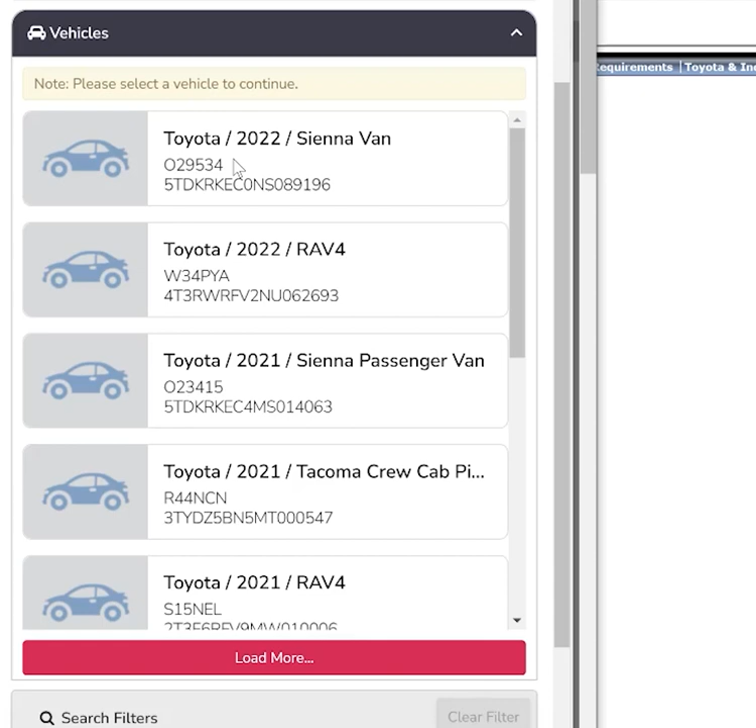So now I hit search, I allow the hamster to kind of go find the database information and then bring it back to me. Usually takes a few seconds. So now when the search is done, I'm able to see all the vehicles that met this criteria. So I can see that I have a Toyota Sienna, a RAV4, a Tacoma, and I actually have a Camry down here. I know from previous experience that this Camry does not have any calibrations done. But I do know that this Tacoma does.

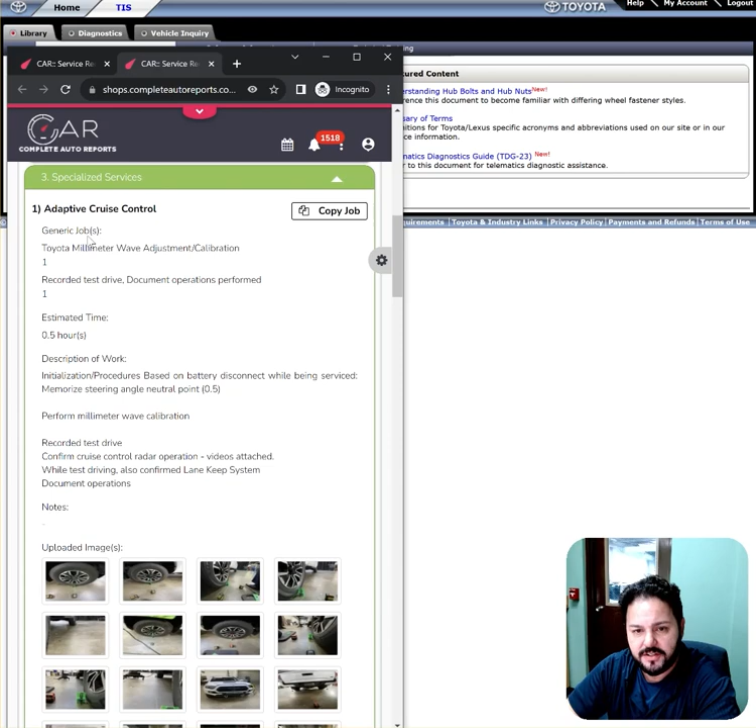So if I want to just look at what I did for this Tacoma, I can click on that link for the vehicle itself, and the system will now load only the services for that Tacoma. If I click on the car ID, it will open that service request in a new window. And here I have all the services that were performed for that Tacoma. So now I have my millimeter wave adjustment and all the notes for that Tacoma. I have the headlight adjustment, notes, photos, lane departure calibrations, and here is my pre and post scan.

So the pre and post scan, as discussed, is where we lay out all the relevant information to let the insurance company know what we're doing, why we're doing it, and how we're doing it. In the vehicle that we are working now, I did this yesterday, so I'm just showing you that I copied that job from here, and then I'm able to paste it on the fly. So in the service request, I can hit paste.

It will show me the job that I copied to the clipboard and most of the information within it. And if I press paste, it will paste that in. If I do it now, it's just going to double it up. So I'm going to show you that everything is already here. And I've gone through some of this.

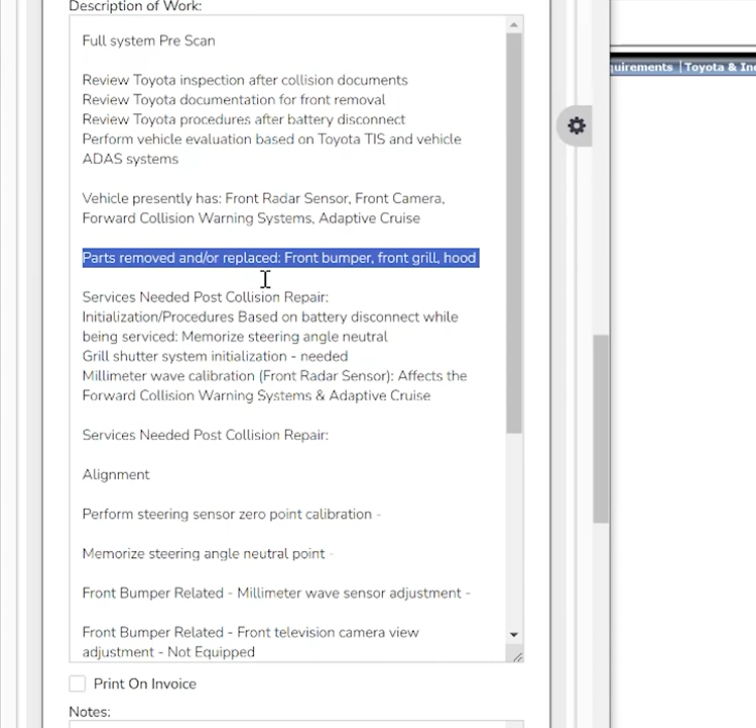So now, in order to start finding relevant information with regards to the collision or the services you're performing, you typically need a list of parts that were removed or replaced. So in this case, the body shop has informed me that they've removed and or replaced the front bumper, the front grille, and the hood. So we know that all of the damages incurred all come from the front end of the vehicle.

Going into Toyota's TIS platform, once you're logged in, you choose the type of vehicle, model, and year that you're working on. So Toyota's pretty simple. I wish they would allow for VIN numbers sometimes, but I've grown accustomed to how they do things here. So now I'm going into Camry. This is not an HV Camry. And confirming we are working on a 2018 Camry. And now I hit search.

And once I do that, typically you'd be on the summary page. The summary page will load all of the relevant information, which is overwhelming, but it does it by sections. So here you have tech tips, service bulletins, Canadian and Mexican bulletins, some quick training guides, repair manuals, electronic wiring diagrams, explanations on new car features, campaign publications, and collision repair. So in order to start your journey with searching on OE info, I suggest searching for the simplest thing first.

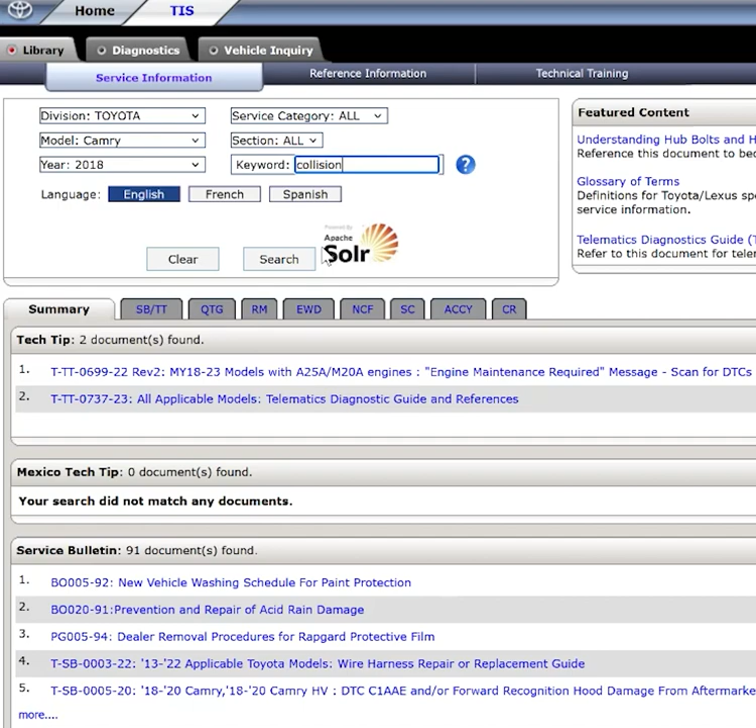But typically, the best way to start with any OE information and searching is just search for the simplest words first. So I would recommend you search for a word like collision or accident. In this case, we're going to search for the word collision, press search, and see what results we have displayed.

So in the service bulletins, you're going to see any items regarding collisions. In this case, there's some bulletins about the radar and the forward recognition camera system. Going into repair manuals, now you have more information on pre-collision systems, and if you were to click the more link here, it would bring you to a ton more information that meets the search word collision.

So going down into the most important part, in my opinion, to get started, is the collision repair section within Toyota. So if you go to this section, you are going to find a ton of information. So we're going to press more, and now you will see that a ton of info is loading here. In the beginning, I honestly recommend you spend a little bit of time and read some of these, because it'll only help you find things faster as you keep doing this.

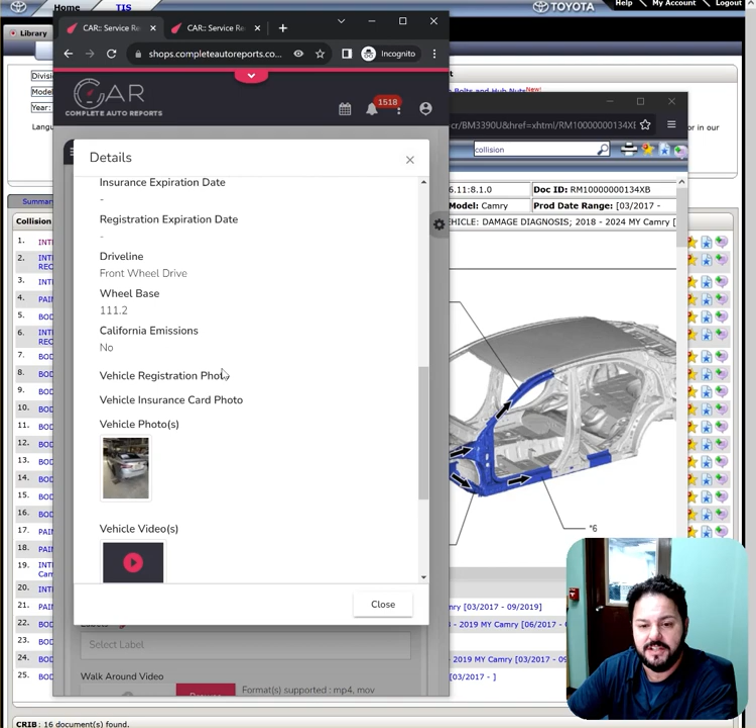But we're going to start with the very, very basic one, which is introduction about this vehicle, damage diagnosis. So clicking on this brings up a pop-up, and the first thing they want you to do is let them know what the manufacturing date is. So we are going to not leave our desk, because this is exactly the reason why we started CAR. And we're going to look at our VIN label and find out that the manufacturing label states this vehicle is manufactured in August of 2018.

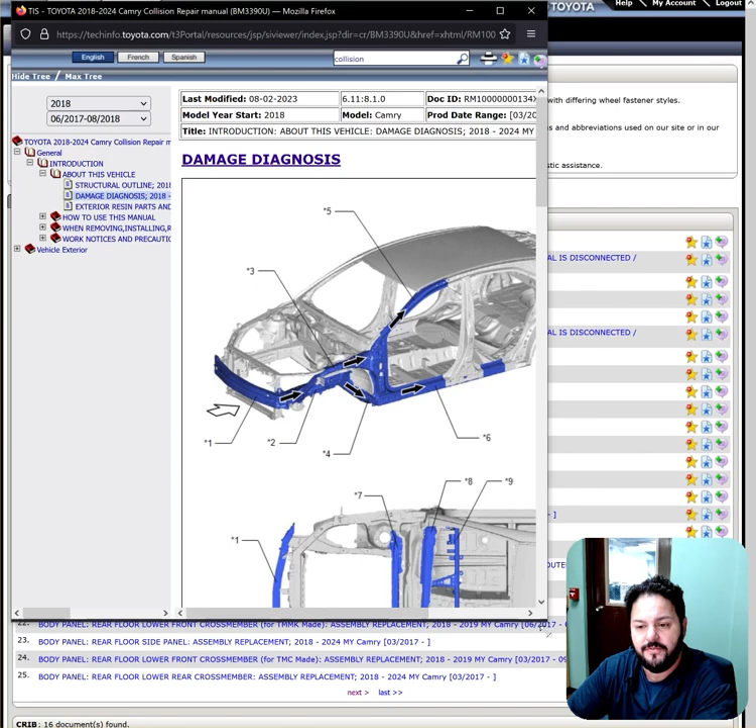So that is the date range, and now we have the most relevant document available in damage diagnosis for this vehicle. So Toyota actually allows you to make some adjustments, but here you can get an idea for parts names, parts locations, other areas that may be affected. It's really kind of a learning tool.

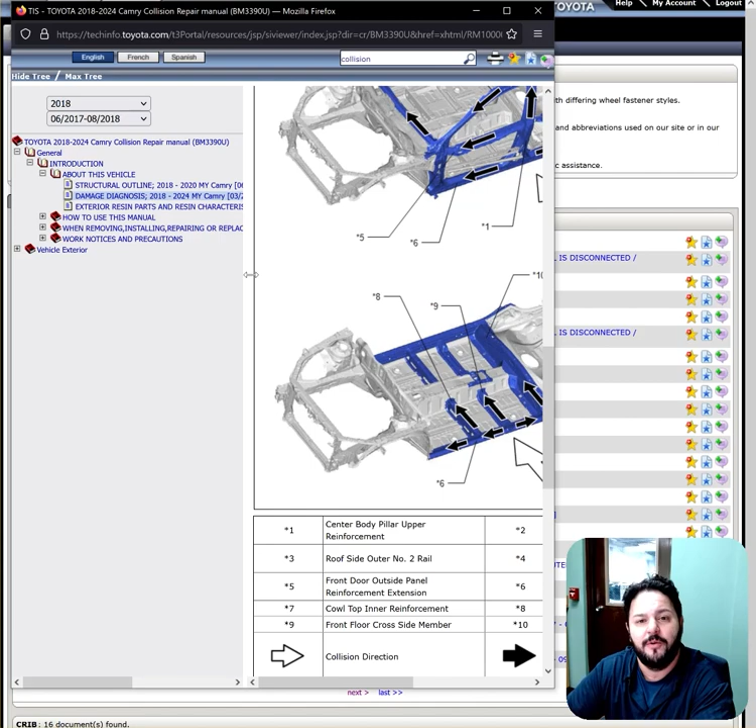I typically would save this just so I have it, but the most important part about what you're going to see here is a section called when removing, installing, repairing, or replacing parts. This is essentially where I would recommend anybody start if you're working on a Toyota or a Lexus vehicle and you're looking to see procedures that need to be performed post-services or post-collision.

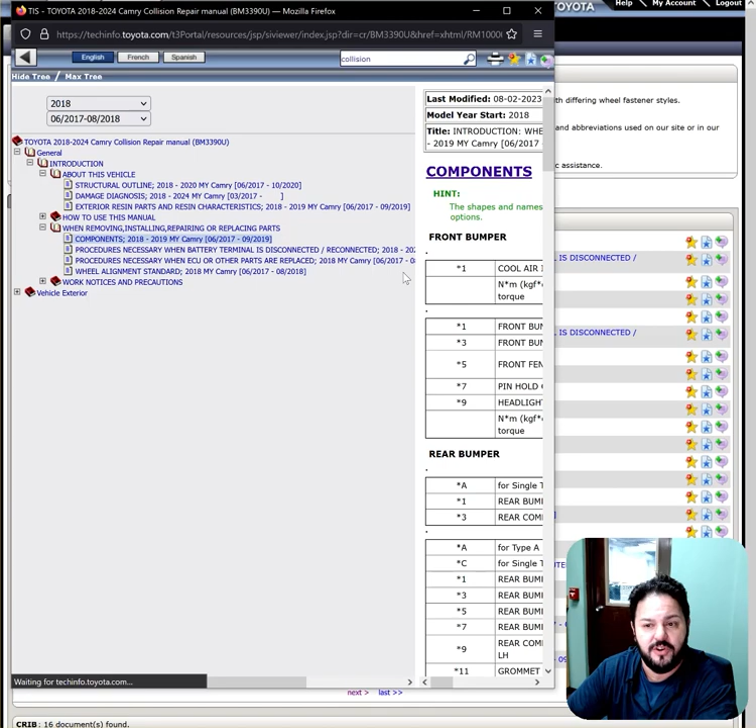So the components give you an idea of all components throughout the vehicle. So you get a really, really great list of everything broken down. I would probably also be saving this. So I didn't discuss this, but I will show it now. Typically, we save everything in a folder in our network share. So for us in this vehicle, we did this yesterday and started it, but you can see on the left here, a lot of vehicles that we work on, we save data for.

Here is the one for the 2018 Toyota Camry, and these are the PDFs that I have saved. In it, you will see these names, which automatically come up when you save them as PDFs, referring to the exact services or functions contained within each PDF. All of this information is saved for us to do analysis and to provide to the insurance company as proof of what work we did and why we did it. We save everything in a network share. It just makes life easier when we need to get paid.

If you were to save this document, you would just press the print button, and if you guys want to waste paper and ink, be my guest, but we like to save a lot of that stuff here. So we would just set destination, save to PDF, and we hit save again, and it's going to ask us where we want it to save. So I'm using Firefox for this exercise, and you will see that it has the correct label, introduction when removing, installing, repairing, or replacing parts components, 2018 to 2019 model year Camry, and it gives you the dates for the builds that this coincides with.

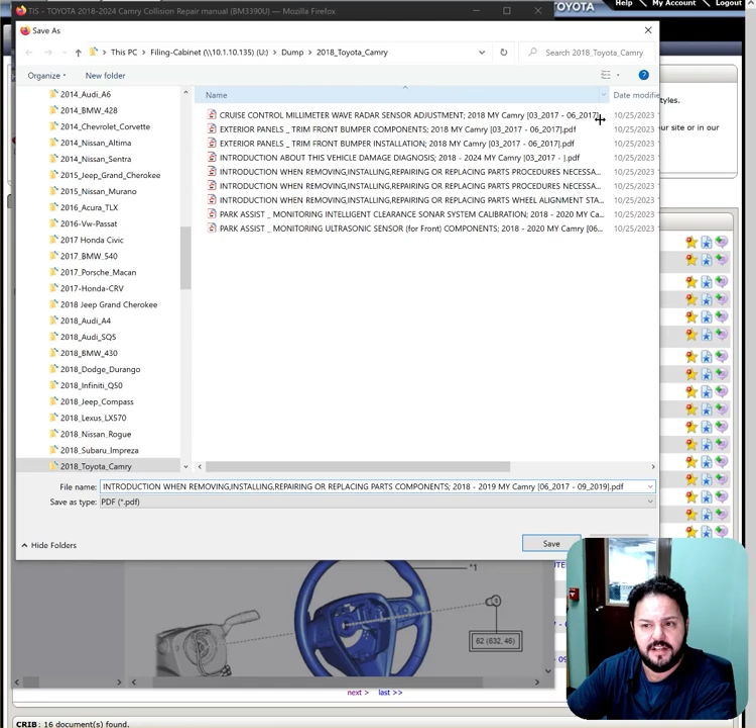And then when it saves it, in this case, oh no, I do not have this one saved. So if I press save, it's just going to write this to a PDF and save that file for me. So I can then reference it, and there it is. And if we open it up, now we always have this file in case we need it.

Going back to practicing, this is where you would start. And I'm going to be really honest, this stuff takes time to get good at. It took me a couple years to really get my head around most manufacturers and how to search.

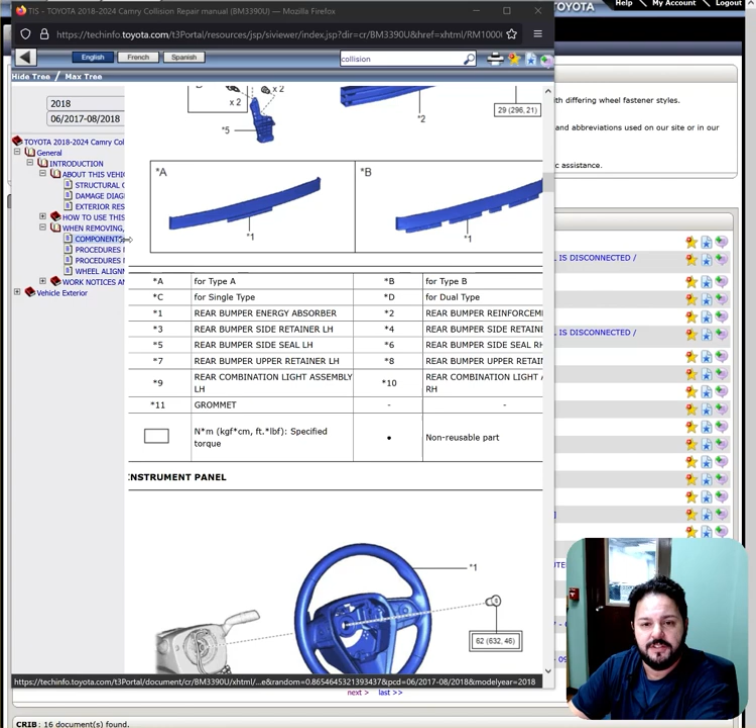Just start is my only honest recommendation. The more you keep doing it, the more it becomes useful to you, the faster you become at it, and the faster you will be able to perform these services when these vehicles are in your bays. Once you save these PDFs, which I've already done, and I've showed you guys where I save them, I'm going to move on to the next stage.

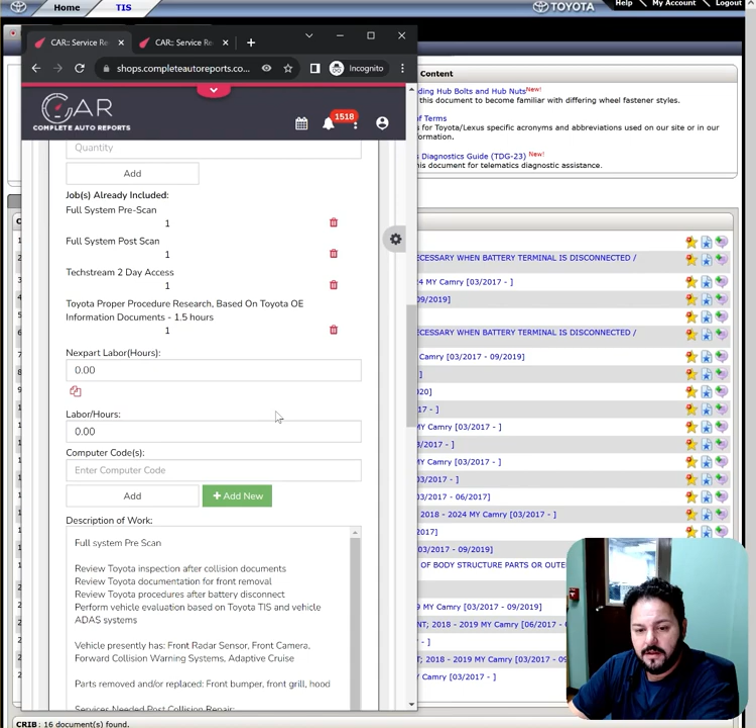So the next stage is searching for replaced parts specifically, and I'm going to pick the front bumper because that is the easiest way to get the thought process across and hopefully instruct you on how you can try to do this yourself with any OE information. So looking back at our service request, we see that the parts removed or replaced were the front bumper, front grille, and the hood. So now we're going to search for the front bumper.

In the keyword, we would type in front bumper. You can see how often I do this because these are my words that I search for commonly on Toyota. So front bumper, we press search, and the system is going to do its internal search and display the results within a couple seconds usually. So now we've loaded, and under the repair manual section, you'll see it's telling you it found greater than 500 documents. This is a little bit of an issue with a lot of OE searching.

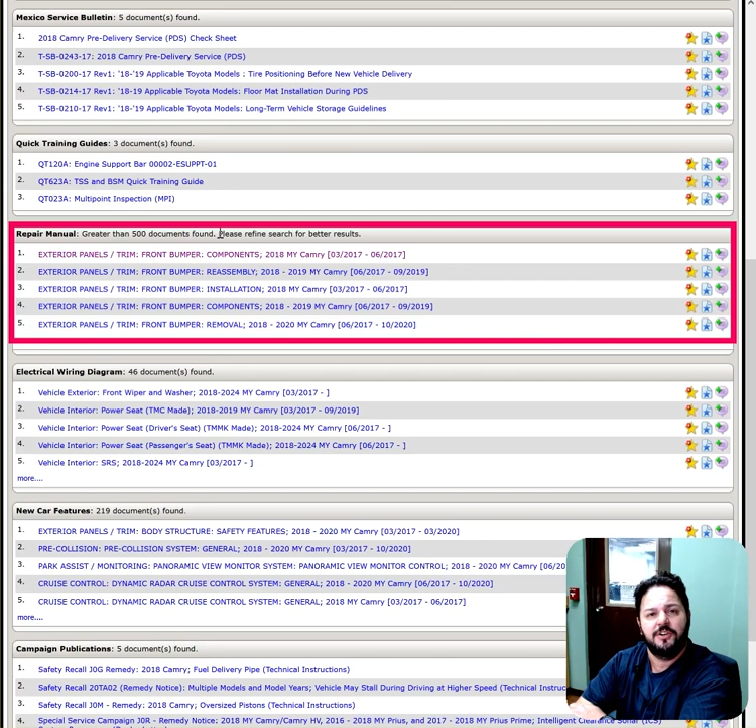You usually get inundated with information, which is why I suggest a little bit of practice so you know how to filter through all the noise and find exactly what you're looking for. So in this case, we're going to press the More button. It's going to bring us directly to the Repair Manual tab and list everything out. So you will notice through the name, we have front bumper components, the year, and then the build date is right after. So make sure you select the one that coincides with the vehicle you are working on. In this case, we want these components.

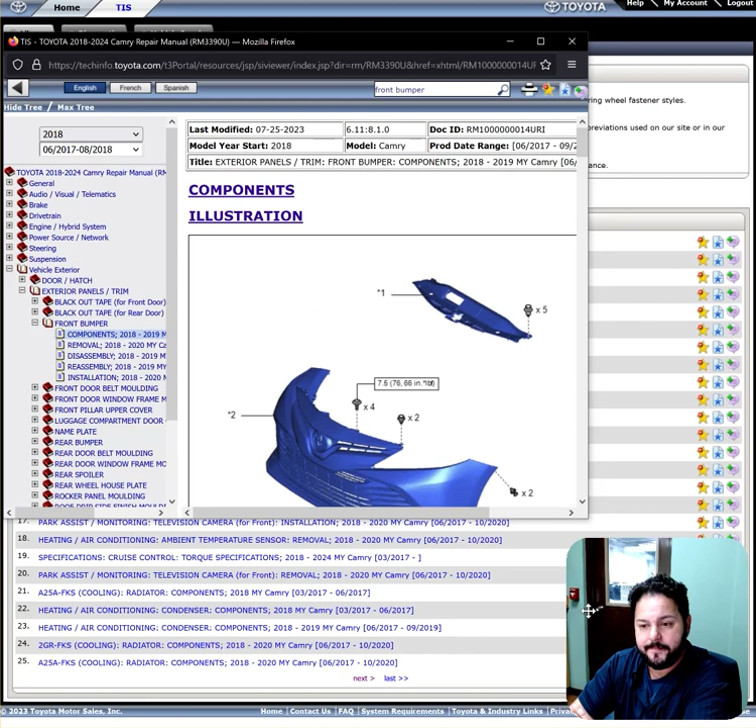So clicking on that brings us our pop-up. Same concept. So if you want to save this, you hit print, save. It's already going to the location that I wanted to. And now I have this PDF for future reference. We're going to go through this on the screen here as soon as it's done. So going through the components list, you literally see every single component that is a part of the front bumper. So here is our first item.

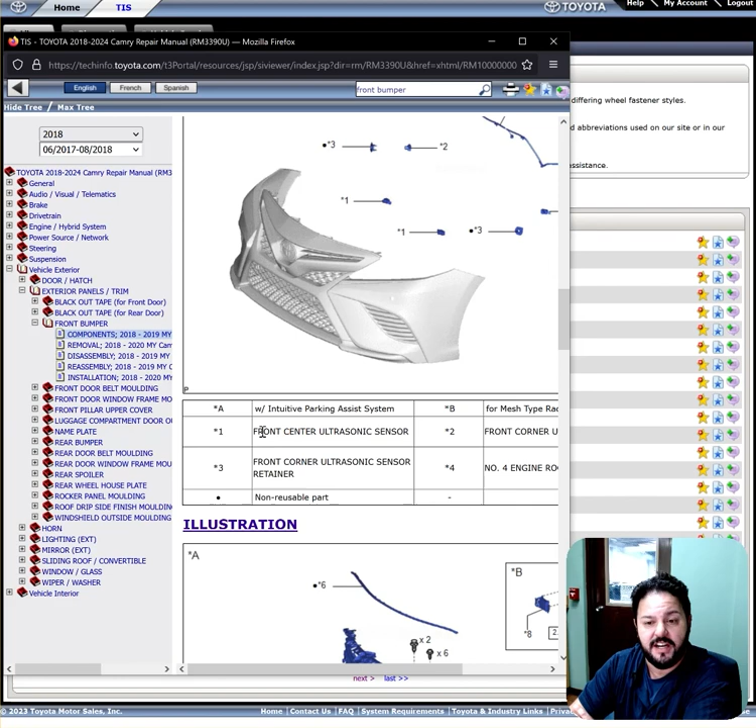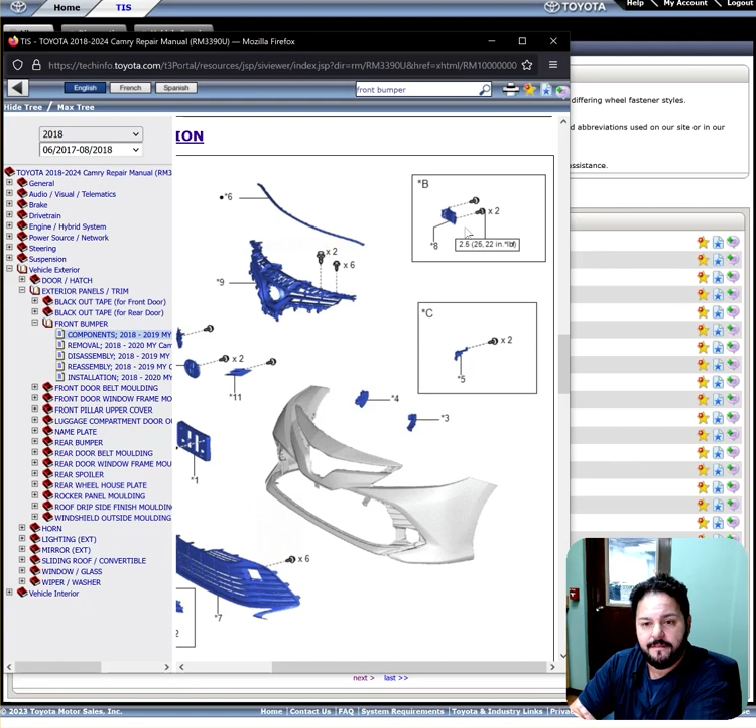We have ultrasonic sensors. So you can walk out to the car and check this yourself. Some vehicles do not have this option. The Prius that we worked on a couple days back did not have ultrasonic sensors, even though it was listed in the repair information like you see here. Going further down, you now see the lower grille, the upper grille, the badge, and behind the badge, you have number 8. Number 8 is our millimeter wave radar assembly. So here we see that we have 2 items that are likely going to require calibration. And if you want to look at exploded parts diagrams for the rest of the vehicle relating to the front bumper and its components, everything is available here.

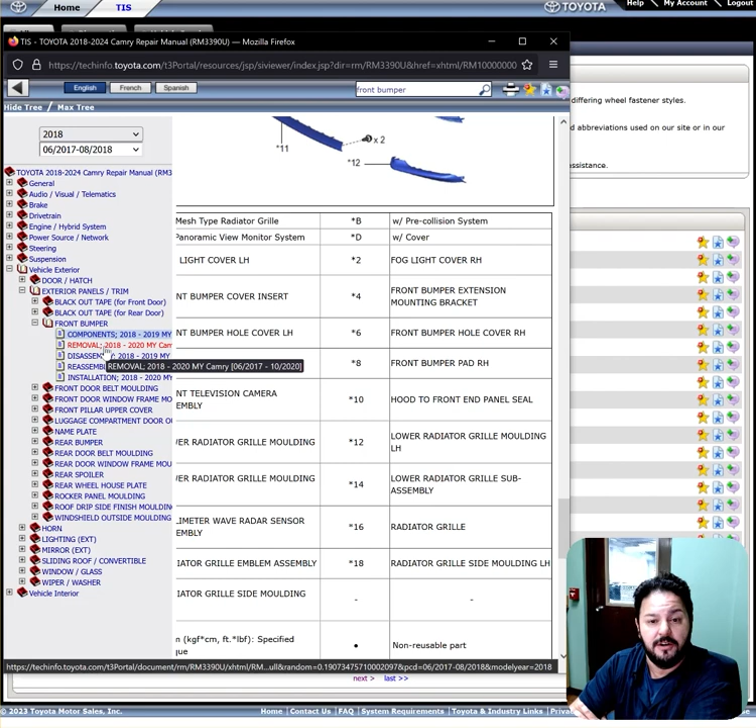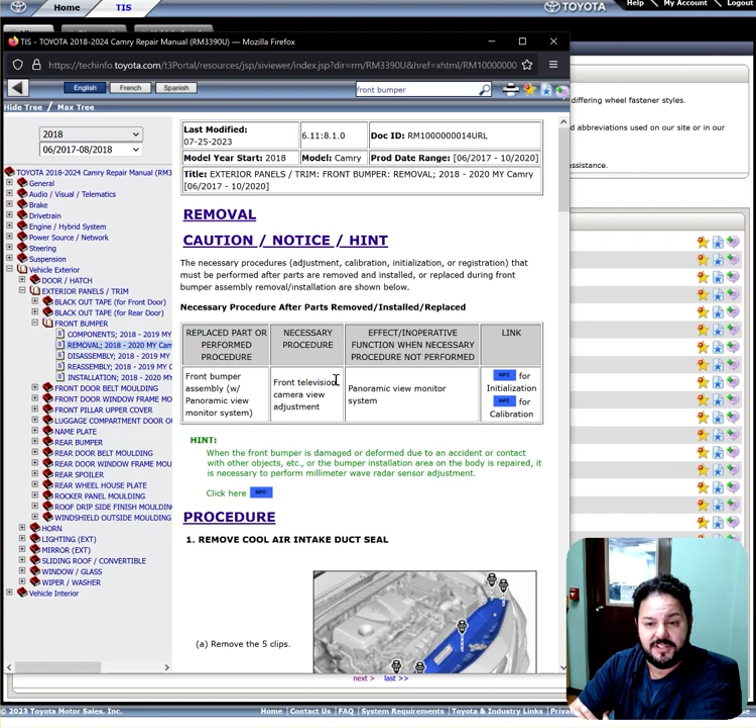So the next step I would recommend is go through the OE instructions for removal, and it will say replaced part or perform procedure, front bumper assembly with panoramic view monitor system, front television camera view adjustment. Now this vehicle does not have a front television view camera. The front television view camera is used for 360 views, and it is used to help you park even if you don't have 360, if you only have front and rear. It is used to help you park and get a gauge for your distance between you and the vehicle that you're parking close to. So since this does not have that, we would essentially ignore this section. But it's good to know because it may have a camera, and this is a reminder to check.

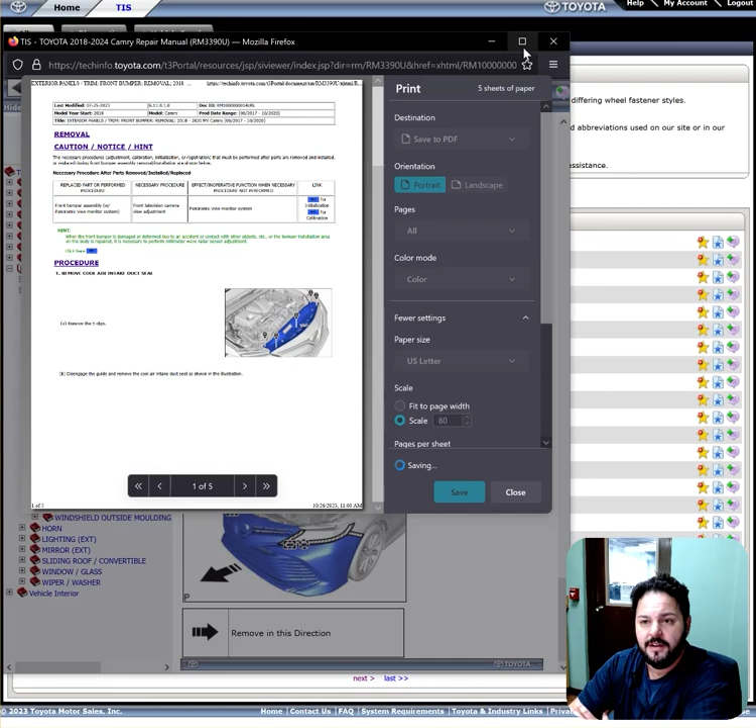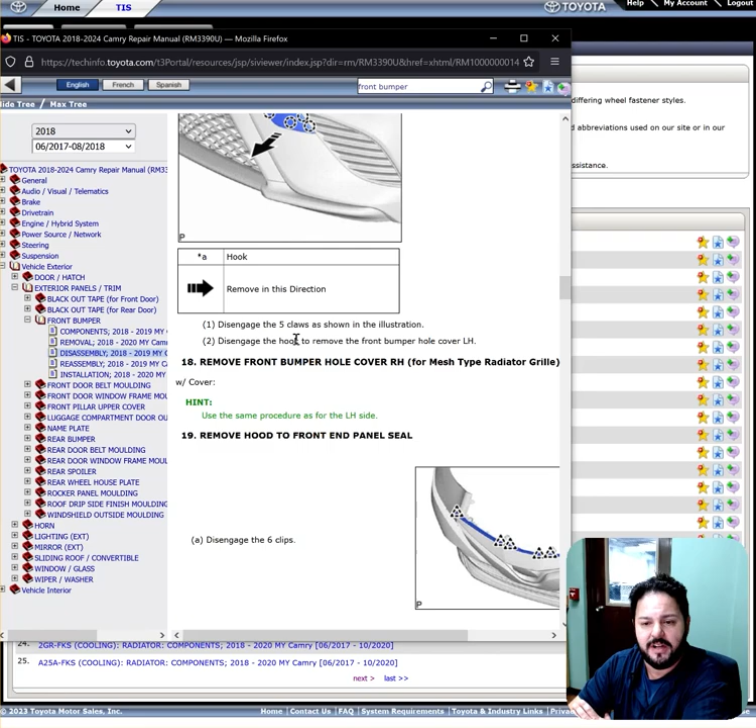They will go through the instructions for removing the bumper. We would PDF this, do it here so you guys can see again just how easy and simple it is to save all of this relevant information. You know what I didn't check is, do I have the right date loaded? Oh, I should. Okay, because I had the right date selected, anything here is going to match. So then you go into disassembly, and it gives you the instructions to remove the wave radar, license plate. You know, it goes through step by step what to do, how to remove the television camera, ultrasonic sensors, where everything is, how it clips in. I mean, it just really makes life easy if you spend a few minutes and go through items like this.

So again, print, save. Might have this one saved already, but in case I don't, I'll have it now. Now, don't skip steps. We are always inclined to just try to find the shortest path to where we want to go. In the beginning, I strongly encourage you to spend a little bit of time. This will come back and pay you 100-fold as you keep doing this.

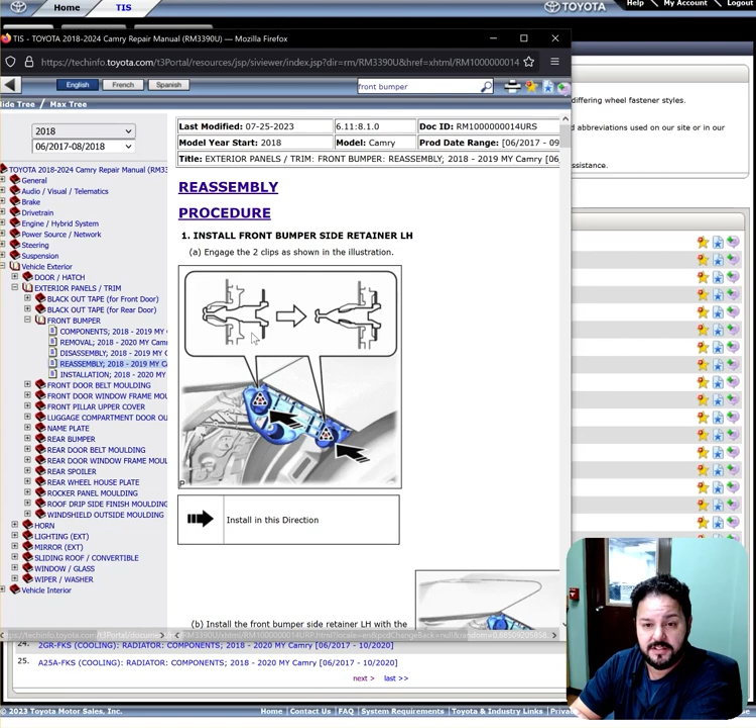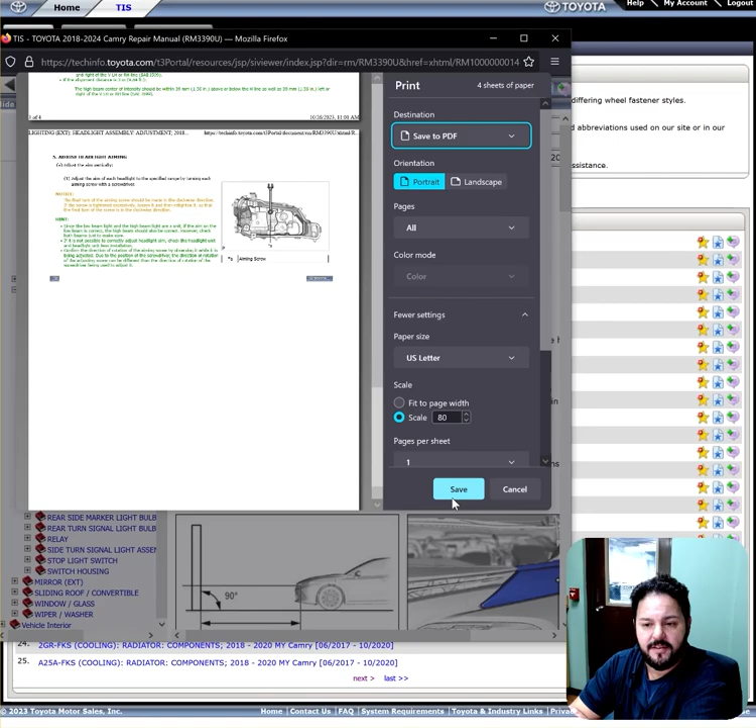Here's why. So if you went directly to installation and skipped reassembly, you would miss out on a few things. So first of all, they have instructions on installing the headlight assembly, may lead to headlight aiming. Let's print that one, save, headlight aiming, print that one, save. So you have all the steps, and a lot of this, again, is basic, guys, but we just found out that the headlights, if they were removed, which I'm going to have to confirm, I do not know at this stage if they were removed, they might have been left on the car. But that's not a question for me to answer, that's a question for me to ask.

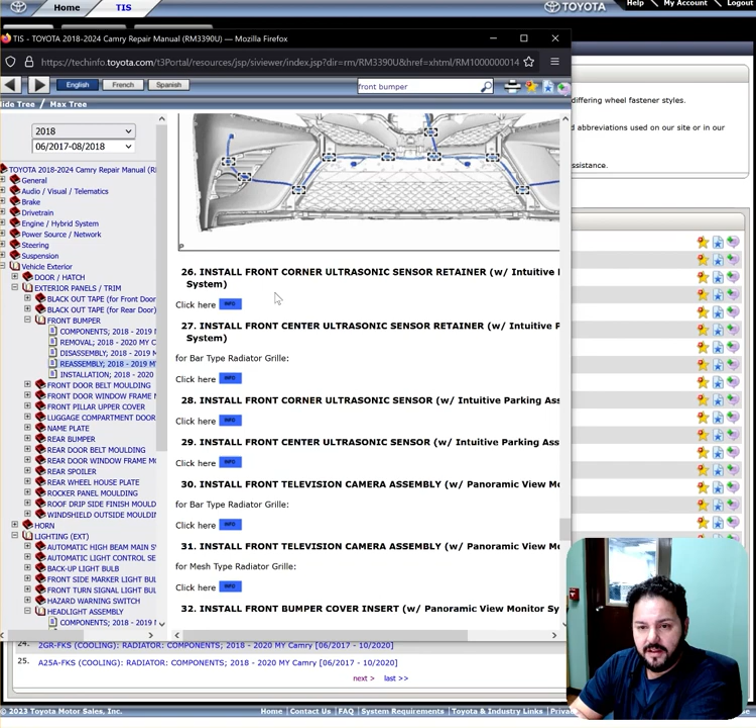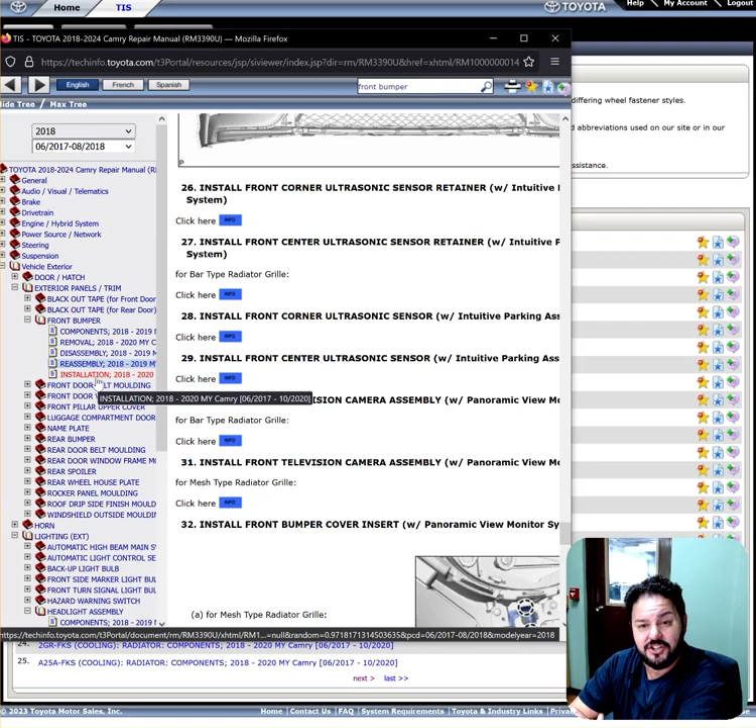But we keep going through, installing our corner ultrasonic sensors, our TV camera if it has it, and then it tells you to install the millimeter wave radar assembly. So this is all in the reassembly section and not even in the installation section. It's important to go through this because when you do, so this vehicle does have the intuitive parking assist. So you install the sensors and they give you the instructions on installing.

And we're probably all laughing right now going, we know how to clip in an ultrasonic sensor. But if you click in info and it tells you how to install the ultrasonic sensor, which most of us know how to do. Again, it's a relatively simple task. So you're going through, but now when you're done with the ultrasonic sensors, it's telling you to install the front bumper assembly, which we know, and perform calibration. So you would not find this function or this necessary function anywhere else unless you went through these sequences.

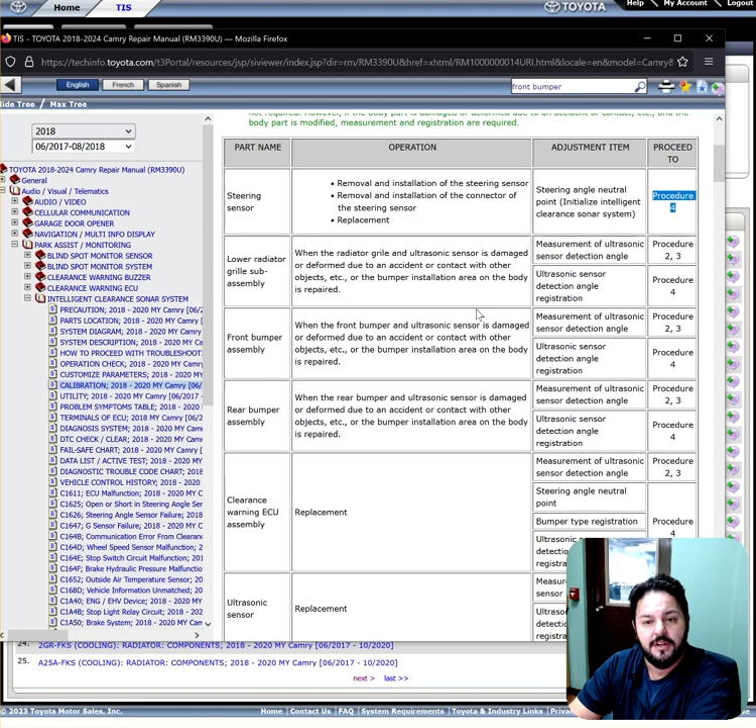So now when we hit info here, we are presented with park assist monitoring, intelligent clearance sonar system calibration sequences. So here it tells you the name of the part, the operation that was performed, the adjustment item that is needed, and it tells you which procedures on this page to go to. So looking for the front bumper assembly, it explains that when the front bumper and ultrasonic sensor is damaged or deformed due to an accident or contact with other objects, or the bumper installation on the body is repaired. So if any of these items happened, this is where it applies.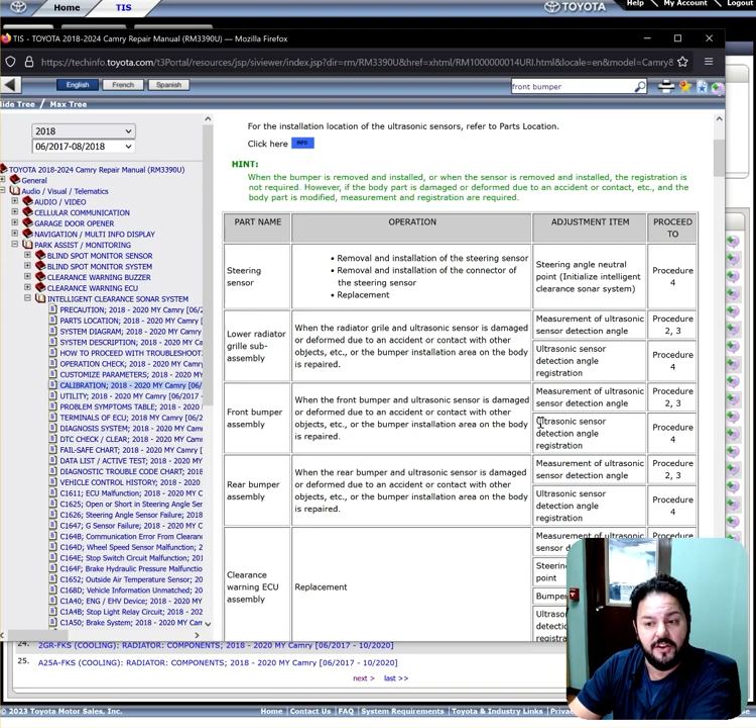And then it tells you that the adjustment items necessary are the measurement of the ultrasonic detection angle, and here are the procedures that need to be done. And then the ultrasonic sensor detection angle registration, and here is the procedure that needs to be done. And then we go through the list. I have this saved, but for argument's sake, we'll save it again. Should prompt me, yep, see there it is, prompting me, do I want to replace it? I'll hit no, cancel.

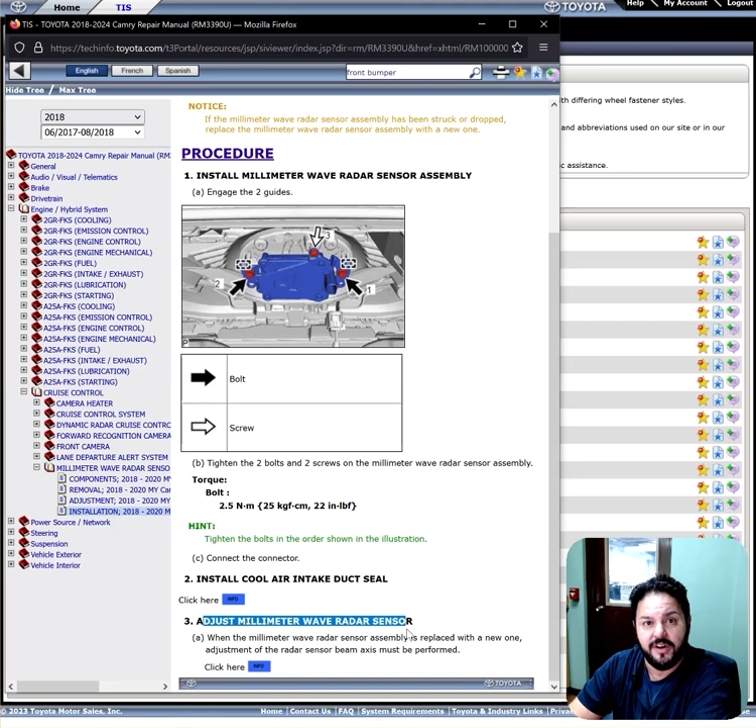When you go into the install millimeter wave radar assembly, it tells you exactly how to install it. If there was an adjustment necessary, they say adjust millimeter wave radar sensor here. By adjustment, I mean a manual adjustment that checks the level of the sensor after it is installed. This vehicle does not have that, but if it did, you may see it here, or you may see it in the adjust millimeter wave radar sensor instructions, which we will see after clicking info. So here we have it. They tell you how big of an area you need, all by measurements, keep objects away, levelness of the ground, so forth and so on.

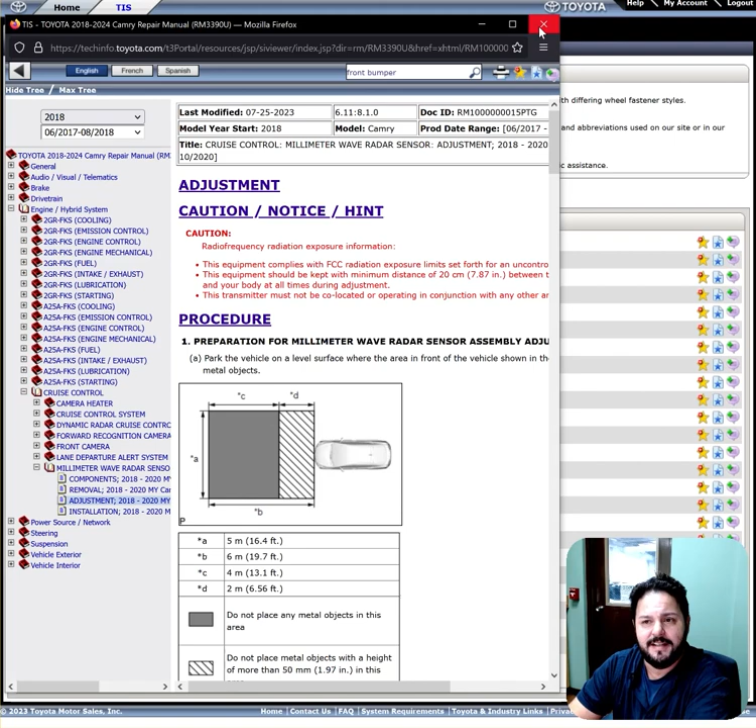Hopefully we'll get a chance to do this Camry live today and hopefully not have as bad of a disaster as we did the other day. But again, same concept, print, save to PDF. But this is essentially the basics of how you would find what services need to be performed post-collision on nearly every and any single vehicle that you're going to work on today. I hope that this helps you guys perform these tasks better and faster, and we're going to keep trying to do more videos to show you how to get vehicles lined up and ready to calibrate in hopefully less than 15 minutes, because that's our real goal.